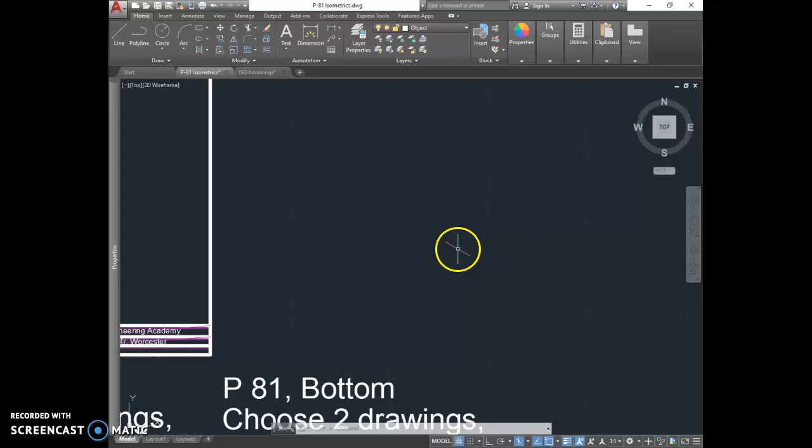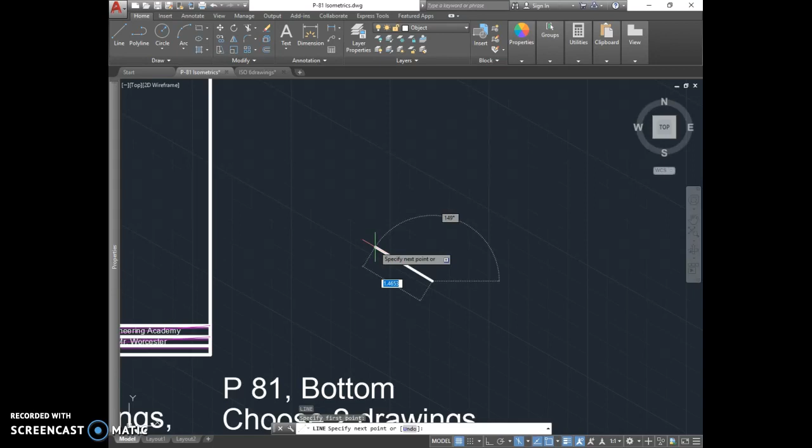Okay, so first off, to do letter L at the bottom of page 81, I'd start by just starting on the front plane. Now, one thing I noticed the other day is some people had their ortho turned off, and with ortho off, it doesn't do you any good to have this isometric drawing setting. With ortho turned on, that's what locks you to those different planes and lets you draw on an isometric angle.

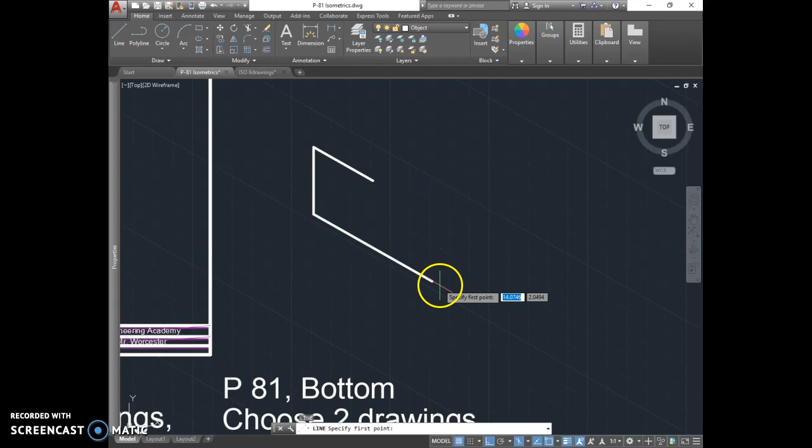So I'm going to start on this one on L by drawing that front little plane. I'm going to go over 3, up 1.5, back over 1.5 to there. Down here on this side, I'm going to go up 1/4 of an inch, and then connect those 2 points together. That gives you the angle if you're looking at letter L there in the book.

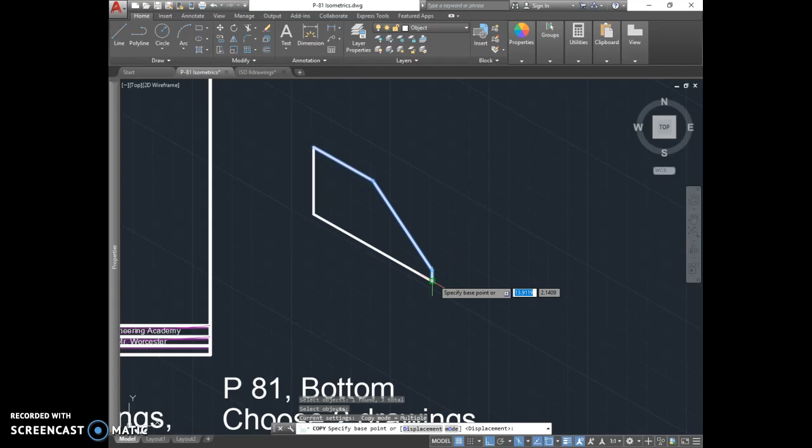One of the little tips I showed you a bit the other day, this is another instance where I'd really use this. On this drawing, these 3 lines would be represented over here making up that other side - those are the 3 visible lines, these bottom 2 would not be seen. So all I'd do is go copy, select those 3 lines, switch to my right side plane or top plane, and copy them straight back that direction. I'm going to make it back 1.75.

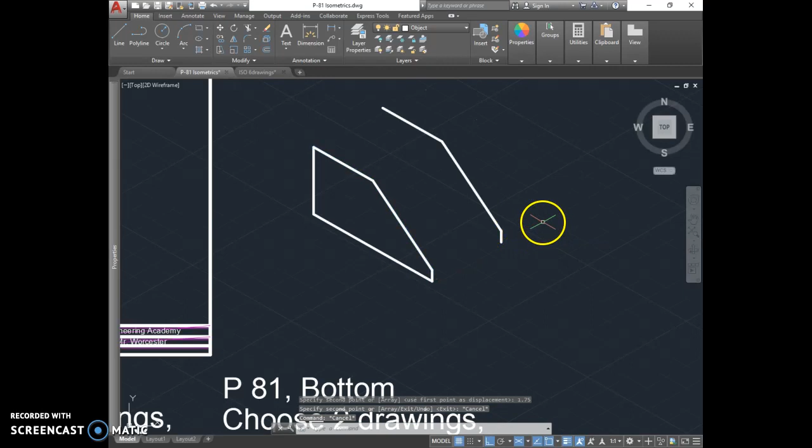That way it's not a nice even number, it's going to be kind of an odd measurement, which will help your drawing look a little nicer here in a second. From there, I'd put the other lines in that go from that corner to that corner, there to there, and there to there. Now what I have left is that little, I call it, looks like the roof of a house - the gable part of a house.

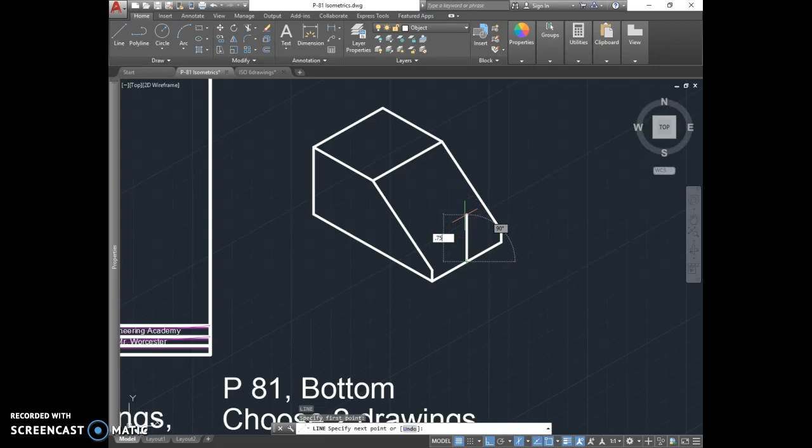To put that in, first you got to lay out to it. So on this one, I'm going to go back to my right side plane by hitting F5 once. I'm going to draw a line from the midpoint of that bottom line, straight up, and that's going to give me the point of that little roof sitting in there. I'm going up 0.75 inches, and then connect it back to my beginning, run to there, and to there.

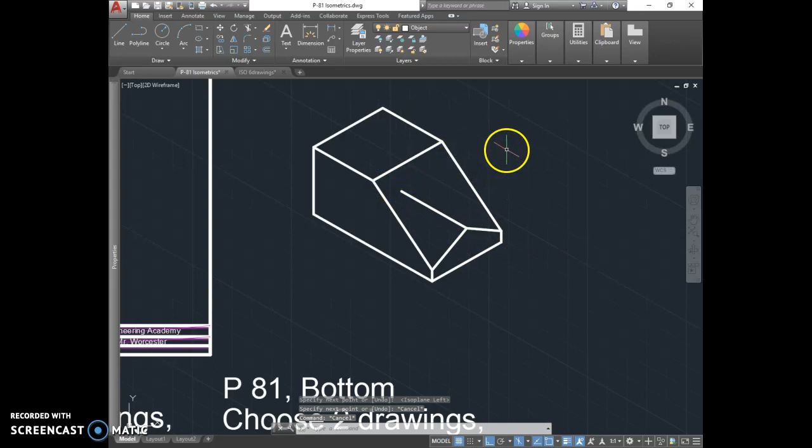So that has this end of it finished. It's out of proportion a little from the book, but I did that on purpose, made it a little lower so you see more details. From here, you just put a layout line coming back off that corner, back at that isometric angle - I have to hit F5 so it goes back at that angle. I'm just going to draw it back in there a way. What I'm really trying to find is where this plane intersects this line.

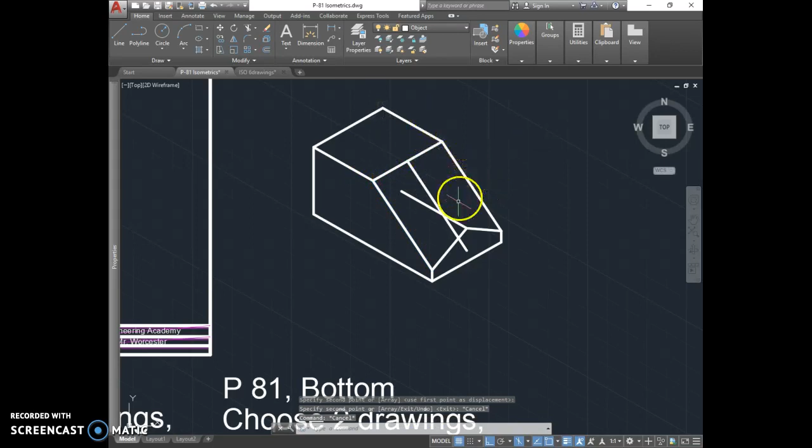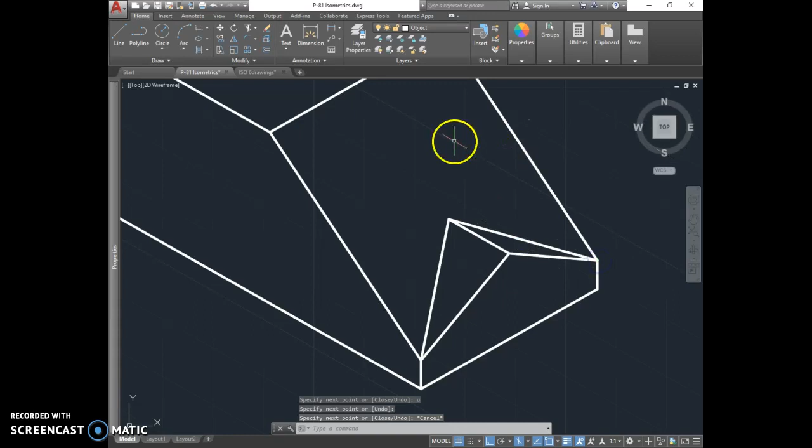To do that, I'm just going to use copy again. I'm going to copy this angled line from that end point to the midpoint right there. Now where I've created this intersection, that's where that line ends - that's where this 30-degree angle line ends. First I'd trim it off to make it clearer. This line is going to be gone so I can just get rid of it. I'm going to go from that point to there, back down to there. And that's got that angle in there, just like shown in the book.

It doesn't look identical to the book, and the reason is they have this vertex a little higher, which covers up this back angle. I made it a little lower on purpose so you can see what that looks like. That brings up a good point: unless you use the exact same measurements they do in the book, and you really can't because you don't know those exact measurements, your drawings won't look exactly like the ones in the book, but they'll look very similar.

This one has a little different details because we're using different measurements. Another part of that is sometimes ours are at a little different angles than in the book - the ones in the book are not always in a perfect isometric angle. So there you go, there's that.

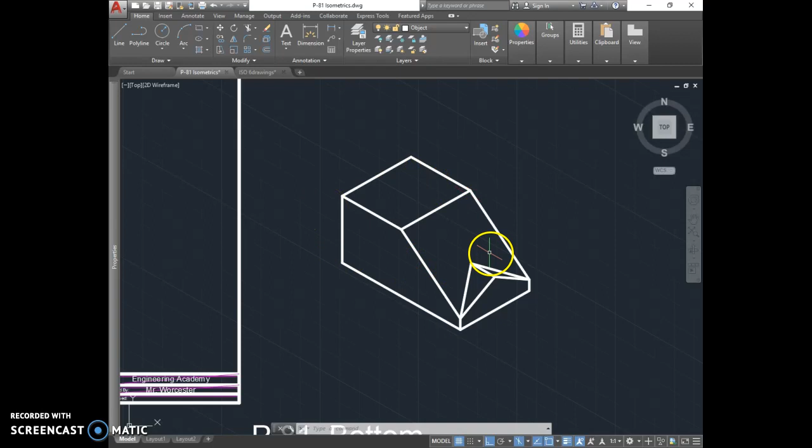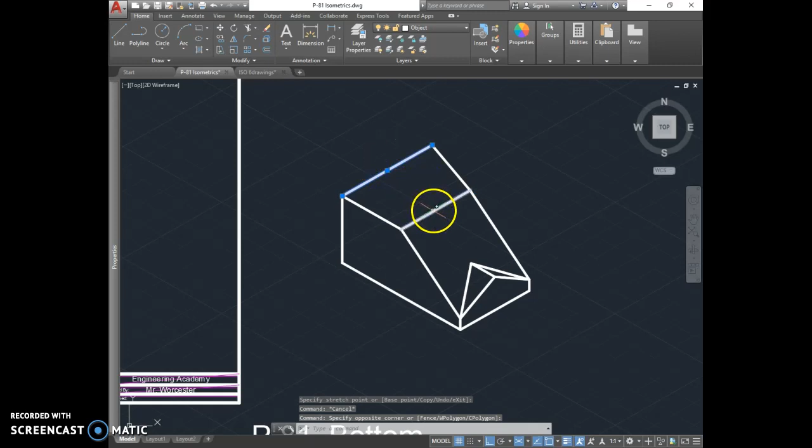The other tidbit I'd mention is, if you're struggling with some of these, just remember it always stays the same width - this line and this line are all exactly 1.5 inches long. So as you're going back, don't change the width of your object. I had some people earlier today where this line got switched to being longer, so their object as drawn went off wrong. You got to keep things the same width all the way through, and it'll definitely look normal.

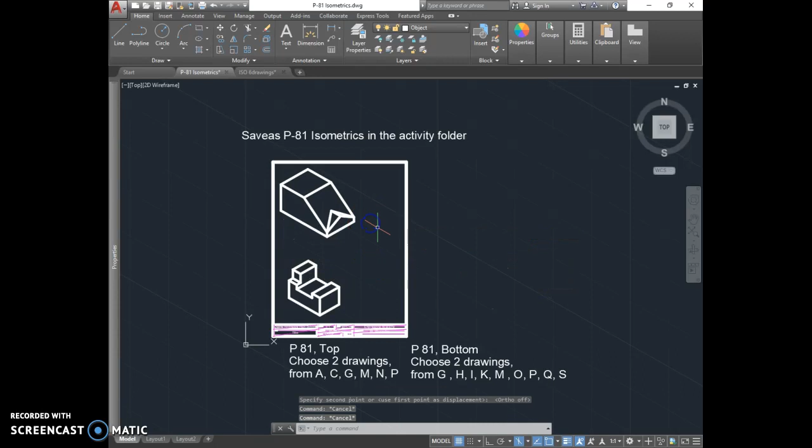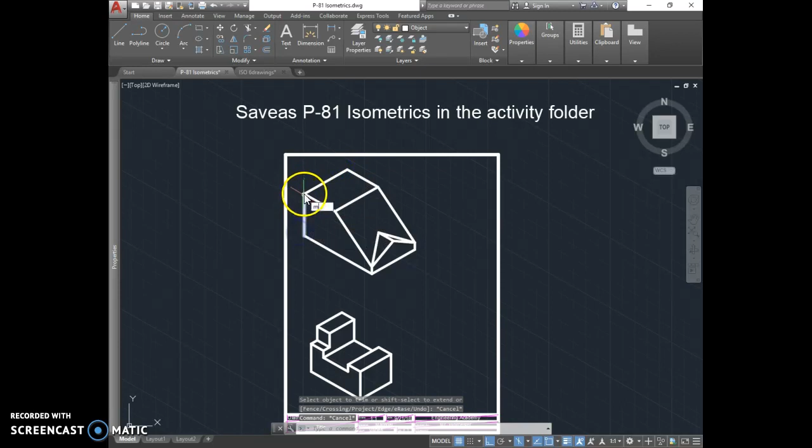So what I want you to do here to finish this up is you'll have 4 different drawings on your screen. Try to make them fit in. Looks like I may have made that one a little too long to fit in there well, so I may actually shorten this one up. I would maybe move that line in at that angle about 1/4 inch and retrim that back off, so make those fit in, and you fit 4 drawings on this sheet.

And you're going to choose again from the GHI, KMO, P, Q, or S.